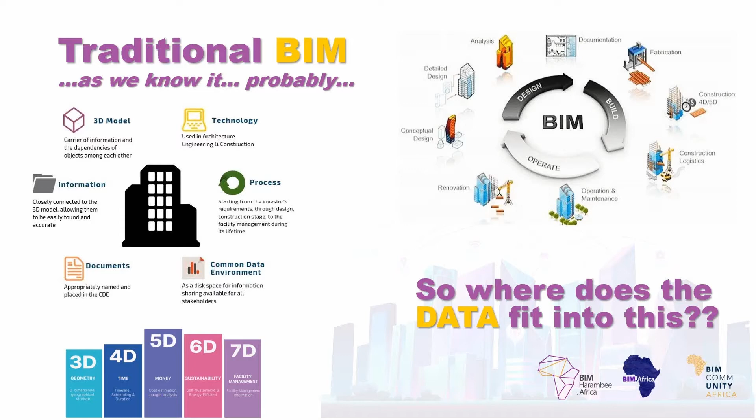So what does this have to do with data? Okay, or where does data fit into this? So let's firstly have a look at what we define as data.

So what is data? Data are individual facts, statistics, or items of information, often numeric, that are collected through observation. In the more technical sense, data are a set of values or of qualitative or quantitative variables about one or more persons or objects. So the thing about data, data is not information.

Let's just clarify. Data forms the basis of information. It's not the information itself. A whole bunch of numbers on a page doesn't tell you anything unless a question is asked. And if we have to ask a question such as how many doors do we have in a building, the data will give us the answer for that.

So data collected in the correct way and organized in the correct fashion gives us information. Information leads to knowledge. Knowledge leads to insight. And insight essentially leads to wisdom. But you cannot have wisdom without insight. You cannot have insight without knowledge. And you cannot have knowledge without information. And like I said, you cannot have correct information without data.

So why data? Data is unemotional, and that's the thing I think I love about it so much, because it's not really bothered by opinion. It's not bothered by what people think. It's not bothered by people's feelings. You know, it's black and white information on paper. It is what it is. And what I love is that it's a clear reflection on the current state of things. We get to see what is currently happening in our organizations, in our designs, on the construction site, etc., etc.

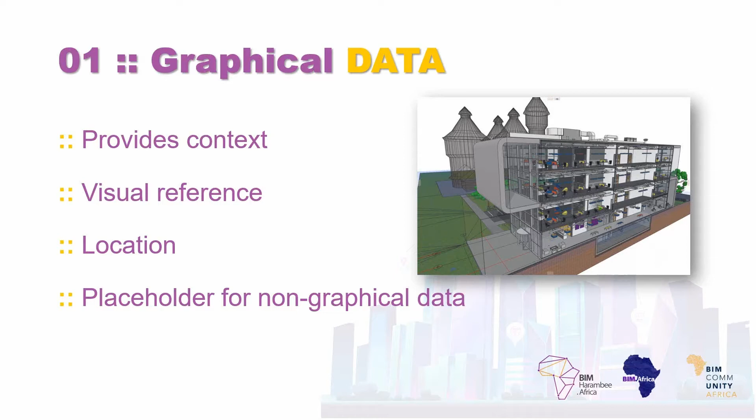There's a site, there's a positioning, there's an orientation, there are weather patterns, there's circulation, there's a country that it's based in, there's a city that it's based in. It gives us a location to which to attach data. And then it becomes the placeholder, and this is the important one, it becomes the placeholder for non-graphical data that we will harvest at the end of it.

So non-graphical data is essentially the meat on the bones. It's the I in BIM. It's the building information, as such. And I emphasize this because I think at the moment we still live in a society, specifically that I've noticed in South Africa, where BIM is a known concept to those who have embraced it, and those who have embraced it have moved leaps and bounds in the industry. But there's still so many architects, engineers that are still finding themselves outside of this BIM environment. And they think because they're working in 3D, they're working in BIM, and it's not really the case.

So your non-graphical data forms the absolute meat on the bones for your graphical data. It is your elements information. It tells you about the elements. A wall is not just a 2D plane where you've got a surface, and those two items together form a wall because there's a thickness attached to it. No, element information now has R values. It tells you the material, it tells you the density, the volume, it tells you how many bricks you can have inside the wall. It tells you so much more, and this information is very important.

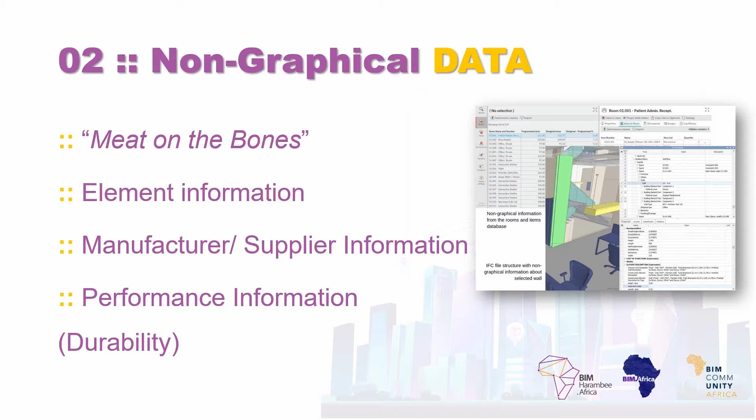It gives you manufacturer and supplier information, and it gives you performance information and durability. The last thing is the documentation. So inside our BIM models, we have documentation that gets produced. So we're talking about schedules, cost estimates, consultant, contractor, and subcontractor information, and product documentation. So all of this needs to be produced for a building to be built anyway. But all of this lives inside of our data models.

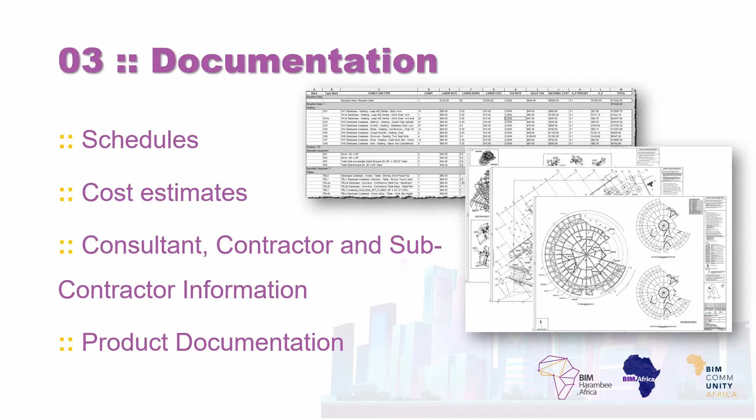And altogether, these three items form our asset information model. So we have our documentation, our non-graphical data, and the graphical data that lives inside of the common data environment to give us this asset information model.

So there's something I'd like to refer to as inward focus BIM versus outward focus BIM. What I found is that the majority of BIM used today is singularly focused on the building itself, certainly in the context in which we find ourselves at the moment. This means building information gets transferred from conceptual design to detailed design to analysis, completing its whole life cycle.

But what if we actually started plugging into local context? What would that look like? This is what I'd fondly like to refer to as outward BIM. What if we started connecting outward, plugging into things and using the data from our BIM models for something bigger, something outside of the building itself?

What if we started plugging into the urban fabric itself? What if we started plugging into items such as ArcGIS? What more can we do with the data that lives inside of our buildings?

Imagine being able to do analysis on movement around the buildings, through the buildings. Imagine making educated decisions on what building to place on what site, because we've had a look at the context. We know what the city needs, what the city requires. If we've looked at people movements, traffic movements, the facilities in the area, we can start making decisions about the urban environment that is far greater than just the buildings themselves, but having the data help inform that process.

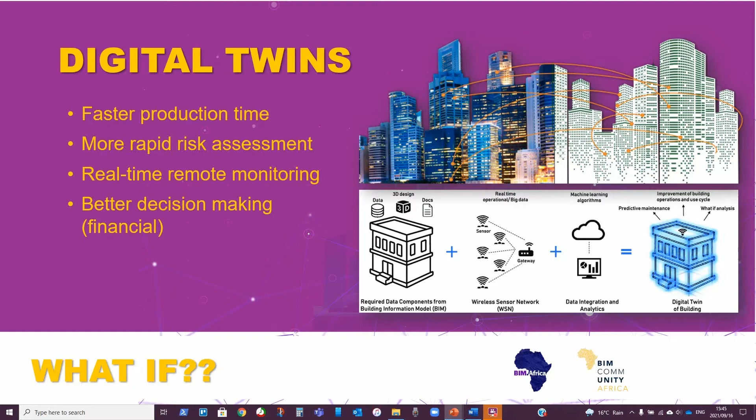So let's talk about data and automation for a second. Now, for somebody whose love language is efficiency, this makes total sense in my life. The idea that we can automate systems, processes, and designs, streamline designs based on data, learn from the data, and create scripts and generative design algorithms - I mean, it's just, why not?

So if we can develop prototypes that we can improve on, we can start automating systems based on the information we receive from our BIM models. We can check for and automate standards compliance. For all the architects out there who have to jump through hoops for local authority approval because of all the check boxes that need to get checked, imagine if we can just automate that whole process and get a report that tells us exactly where we're lacking. The time savings is immense at the end of the day when it comes to automation.

And we can just see that right now, how things have changed in the last little while - just to be able to automatically number doors, automatically number windows, automatically generate basic buildings, automatically generate layouts for buildings, best layouts based on views and location to major routes, etc. It's mind-blowing stuff, but all of that is founded on good data outputs.

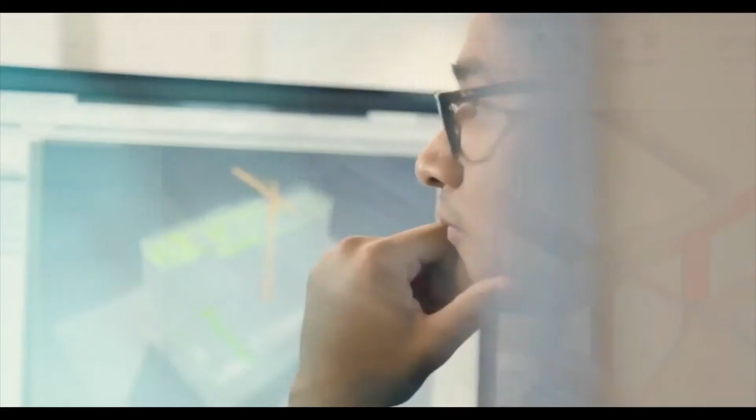Today, designers are spending a lot of time manually creating design options. AI, machine learning, generative design, all these different technologies provide us with the possibility of making that process faster and more efficient, the opportunity to not have to start from scratch again.

AI and machine learning try to get the computer to learn from past behavior, and in our case, that is data. So in the context of architecture and engineering, you can start feeding in documents to understand what is contained within those documents and have the machine make decisions for you faster based on the historical context.

Google Maps is actually a really good example of machine learning. You get traffic estimates, when we should leave, an estimated time, even for a trip you're trying to take 10 days from now. It'll estimate based off of previous traffic patterns, past data. If you can imagine your life before Google Maps, we use it and now we can't live without it.

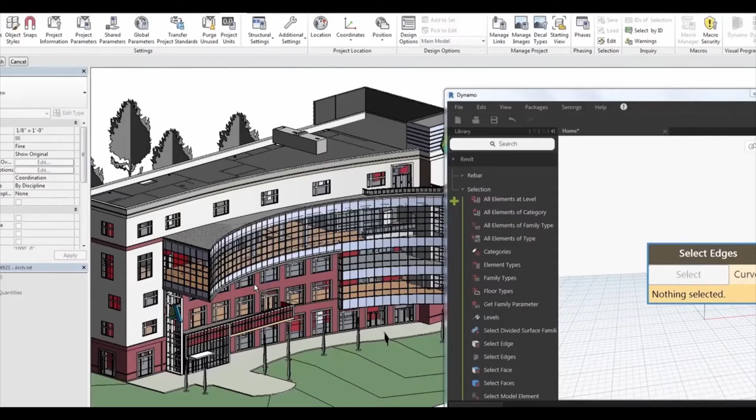It made our lives easier and made it so that we have a lot more information so that we can make better decisions in the moment. Data is going to be that for design and construction.

In generative design, instead of designing a building in a linear process, you define the boundaries, you define the actual metrics of the building, and within that space you can birth a whole series of different designs and then rank them against each other. So customers have the opportunity to see a whole bunch of different design options that can help them quickly narrow down their problem spaces faster.

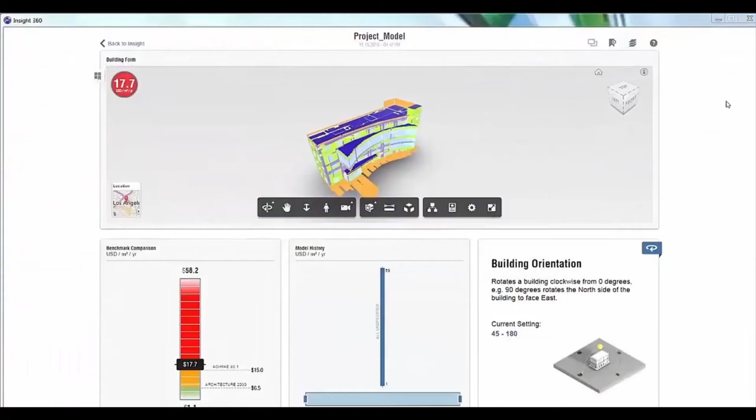And this can benefit everybody, not just the designer. If you start building in some of these metrics at the start of your design, then the building owner can start making more informed decisions and understand the outcomes faster. It also helps the environment when you start building in the understanding of materiality and cost, and potentially how far away this material has to travel to get to your site, into this algorithm at the outset.

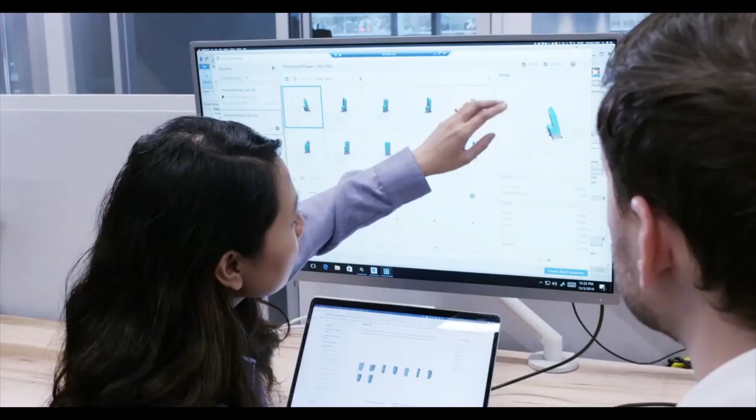They have outcomes that they want to get to, and they have the data. If you pair that with a generative design approach, then you can have a very powerful system that would be really beneficial in trying to build the optimal solution for their buildings.

Generative design is this beautiful symbiosis between man and machine. You have the human component at the front end making all the decisions and setting what they actually want to get as an outcome. You have them also at the tail end of the process where they evaluate those outcomes from the generative design process and choose the one that best fits.

So the context here is AI machine learning is around making decisions from the past. Generative design is around birthing visions of the future.

The bottom line here is what we're trying to do really is give more time back to the designer. And so what generative design does is it enables you to build an algorithm that starts to understand both art and science, so all of the boring mundane tasks can start being taken away by the machine.

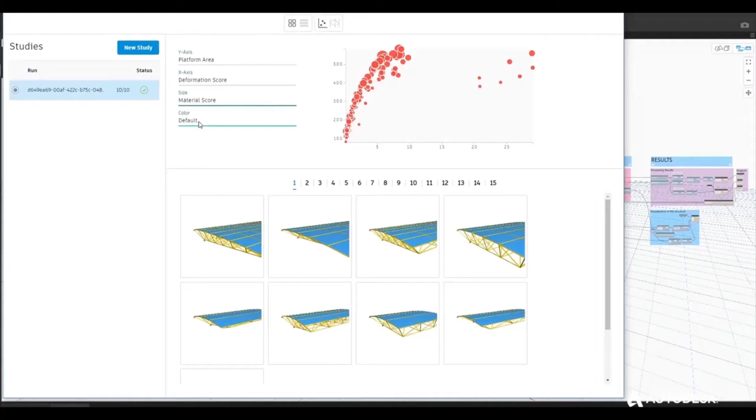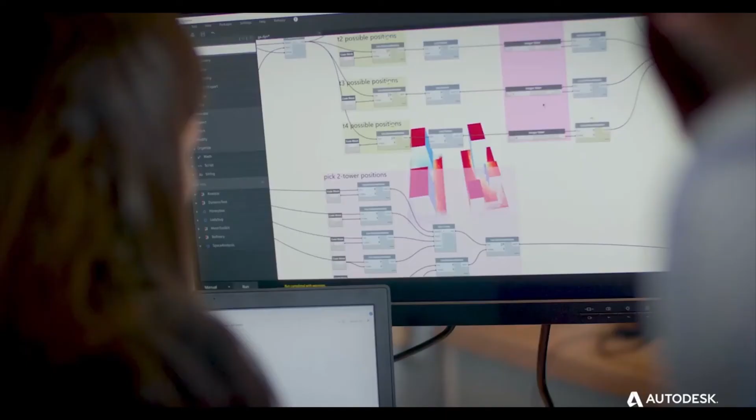Things around compliance, does the fire egress drawings work correctly? Is my building going to stand up? All of these different kinds of things a machine can actually do very, very well. And this is what we want to shift using generative design and AI ML. We want to have humans doing what is really good for humans and the things that we enjoy doing from a design perspective, and take away some of the grunt work or the mundane work.

Thinking about smart cities, with the theme of the conference being Smart Cities in 2030, BIM forms the context. As I mentioned earlier in my talk, without some kind of physical context, sensor data is essentially useless. We need to know where the sensor data is reading from, we need to know the location, what context is it filling itself in. BIM data directly forms the context for all of that information.

BIM data also allows us, along with the sensor values, to manage the internal environment by connecting sensors to BIM elements. We can monitor equipment inside of buildings, schedule maintenance further ahead, and know when certain elements of the building are starting to pack up and are starting to break.

We have sensors that can monitor people flow. We can see which spaces are being utilized, manage how the people flow works around and inside the building, and what the heat loads are. We're able to gather data over a year period as to when the most money will be spent on heating and cooling, and when less money is spent on heating and cooling. So all of this information forms a great part of where we're going in terms of smarter cities and our vision for smarter cities going forward.

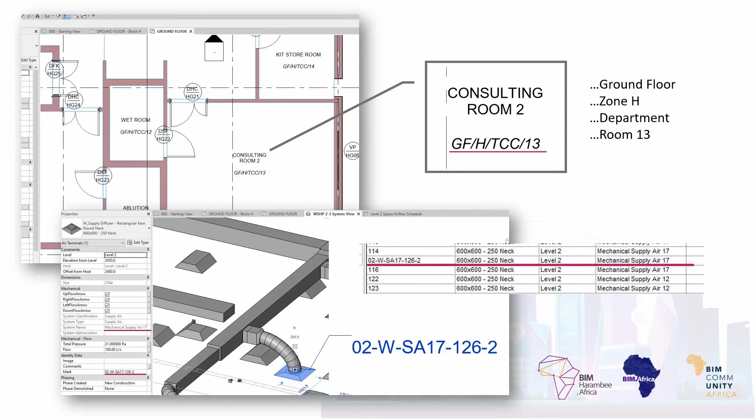So the next point I'd like to make is to learn to visualize your project data. Now, if you've worked with me, you would know that I'm the schedule girl, okay? I love schedules, and the reason I love schedules so much is that they're able to give you insight into your model that you wouldn't see just by looking at it.

So whenever we do health checks, and whenever we check if models are behaving correctly or performing as they should, or avoiding clashes and all of that kind of stuff, I create a schedule for it, because a schedule will tell me what the data says, and the data will tell me if the model is accurate. So if we're working in a product such as Revit, for instance, I'm able to draw my schedules, and when I scan through them, I'm able to see what the numbers are saying to me.

The thing is, if you consider that all this data you're generating from these schedules and from these models equates to costs and equates to quantities, it's quite important that your data be correct, if another consultant is going to be working with your model, if another consultant is going to be generating information from your model.

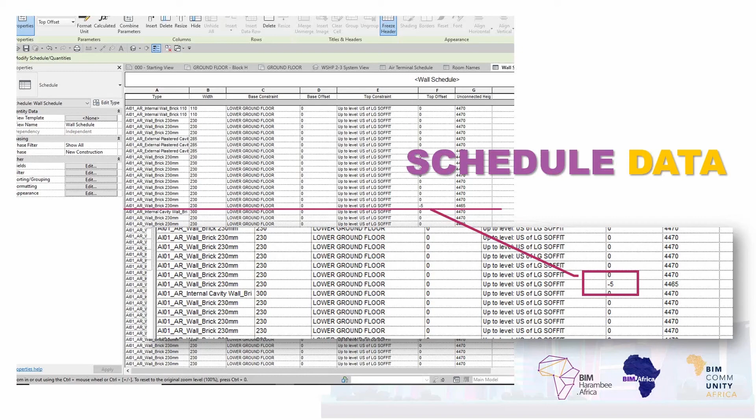You're not going to pick that up straight away looking at a model. It's not something that is evident. But if we generate a schedule and we look at the data, we are able to see a whole different side of the story, which is very important for us going forward.

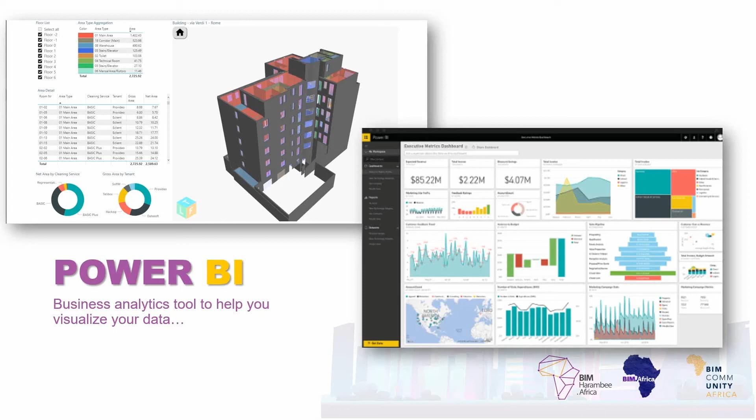This is another tool I've come to love and appreciate in recent months: Power BI. What Power BI does so well is graphically represent the story of the data inside your model. You can plug your model data into Microsoft Power BI and draw analytics from it. You can determine cost spaces, occupation levels, do energy analyses - it doesn't do it for you, it just reads what the model is outputting. So I can highly recommend Power BI form part of your data analysis process.

Project postmortems - I don't know why people don't do this more often, and I know there's a time constraint to these things, but looking back at a project and analyzing what you're left with, all the data from a specific project, it's gold for anybody going forward. Just by looking at the outputs from our models, we can ask: what could we have done better? Where could we have saved money? How could we do things quicker? Where did we lose most of our time? Where were most of our on-site issues? Was there something we could have predicted? Could we have avoided these issues if we considered the correct outputs and data? What can we learn from the things we did well, and from the things we didn't do so well? Bottom line, how can we improve?